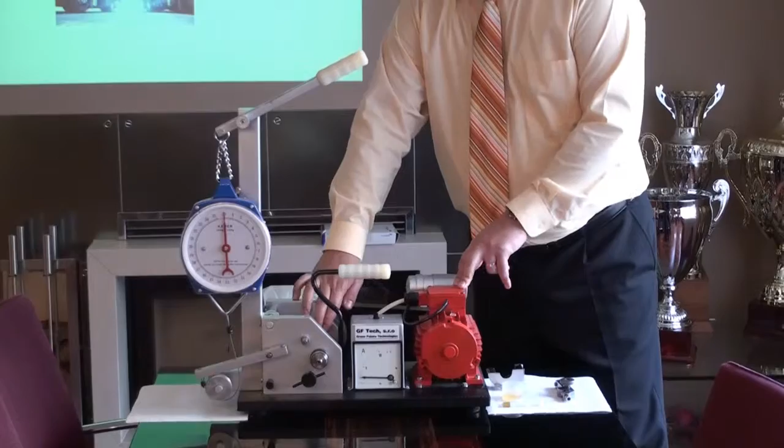Let's now go over to the practical part of our presentation. This machine you can see here is a simple variant of a more complicated laboratory testing machine. It consists of an electric motor which drives this axle. On the end of this axle there is an outer bearing ring which rotates. We will generate friction by pushing this opposite part against the bearing ring, and we will try to stop the ring from rotating.

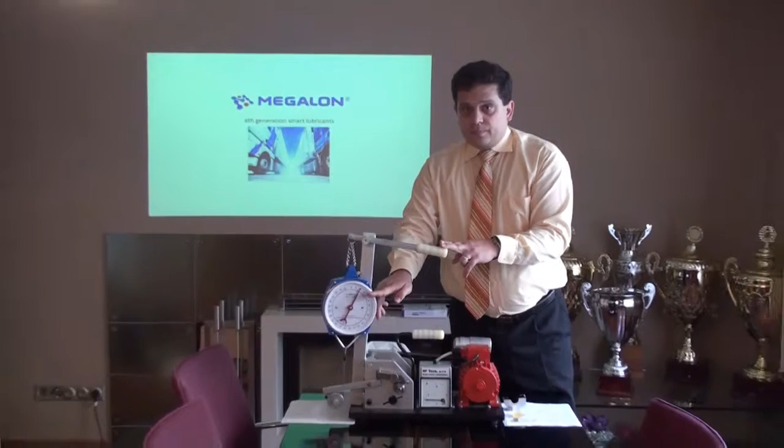This is what we will do. Under several types of condition, we will constantly check the power applied to the bearing ring in kilograms, the power consumption in ampere, and the attrition, which we will see on this opposite part.

The condition number one is a so-called dry test. We want to see how much power we need to apply, how high the power consumption will be, and how the attrition will look if we don't use any lubricant.

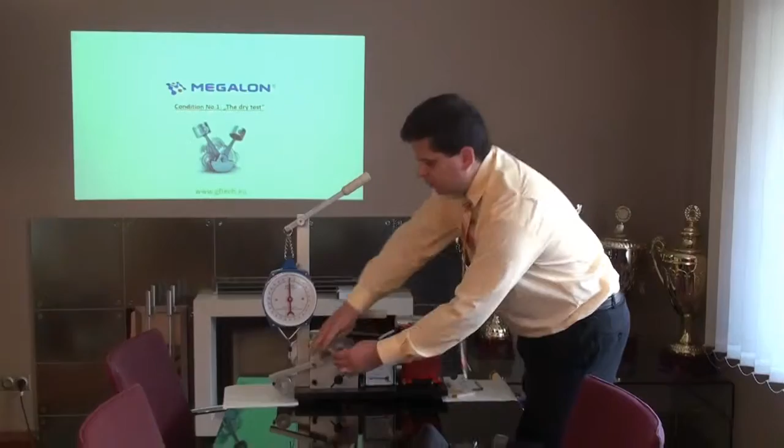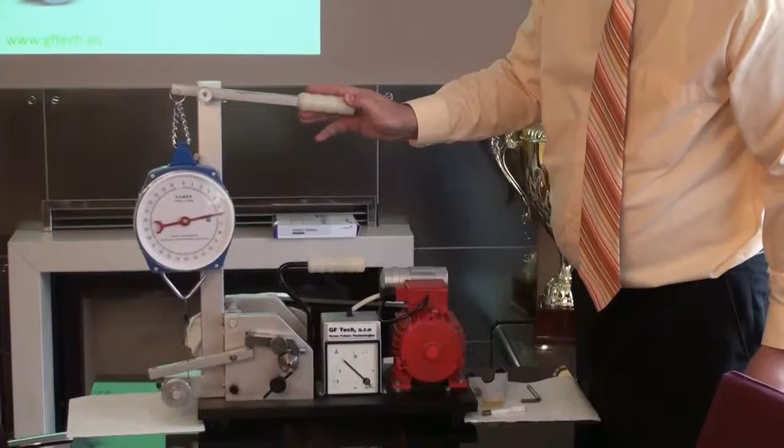We see that the machine got jammed after applying 5 kg of power. Its power consumption was 8 ampere, and now let's see how the opposite part will look.

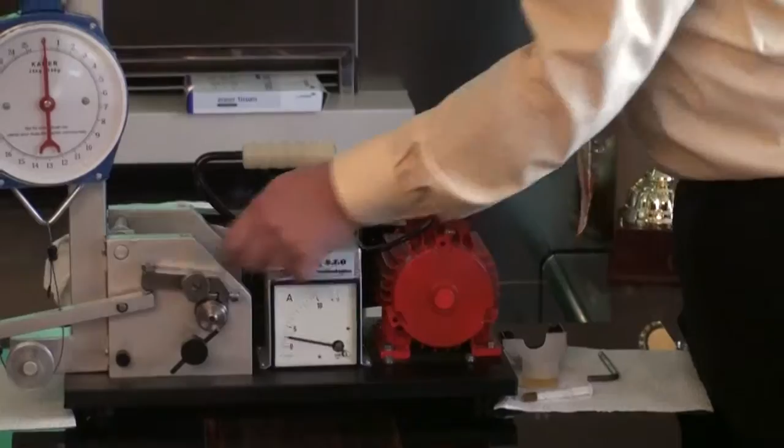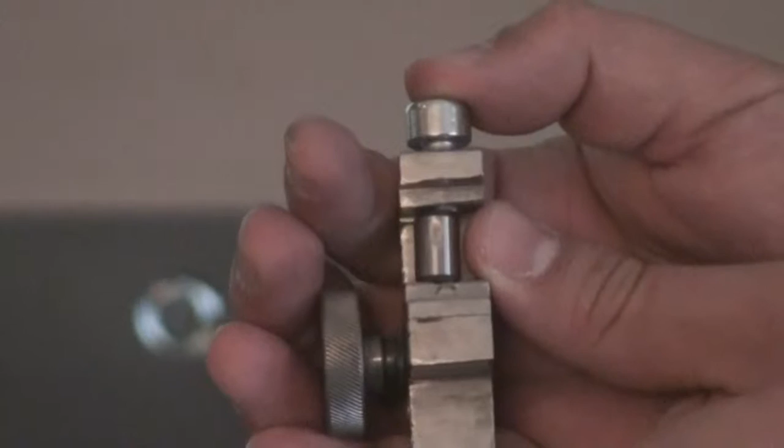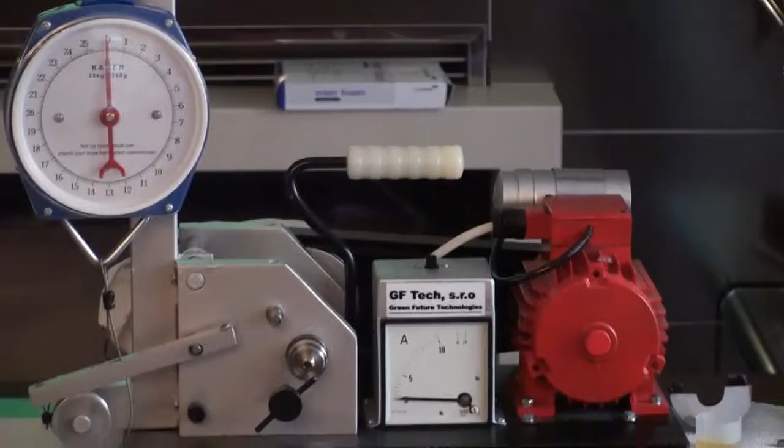You can see that the opposite part has been abraded and parts of it stayed even on the outer bearing ring. This we need to clean, so the following testing conditions are not affected. The outer bearing ring has been cleaned, and now we need to turn the opposite part to a non-abraded spot so we can compare the attrition of all testing conditions.

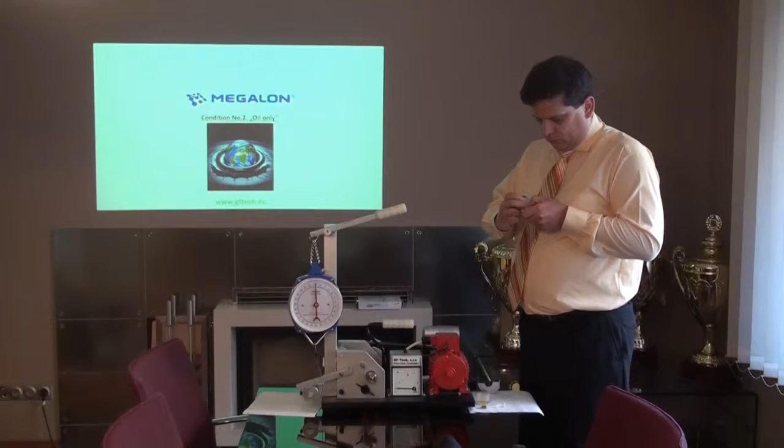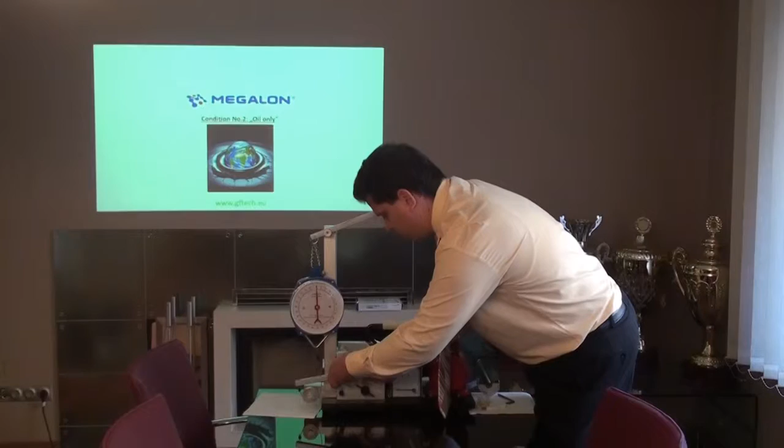Under condition number 2, we will use oil only. Like I already mentioned, it is not important to which oil Megalon is added, so I have here some semi-synthetic oil from the nearest gas station to perform this test. We add 7.5 ml and fix the oil tap to the machine.

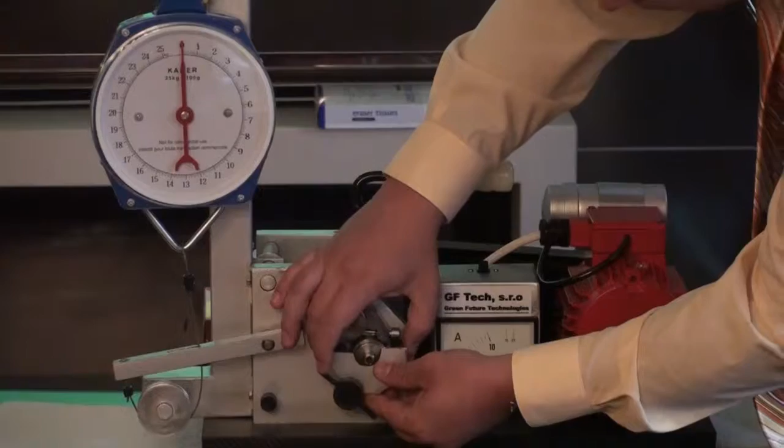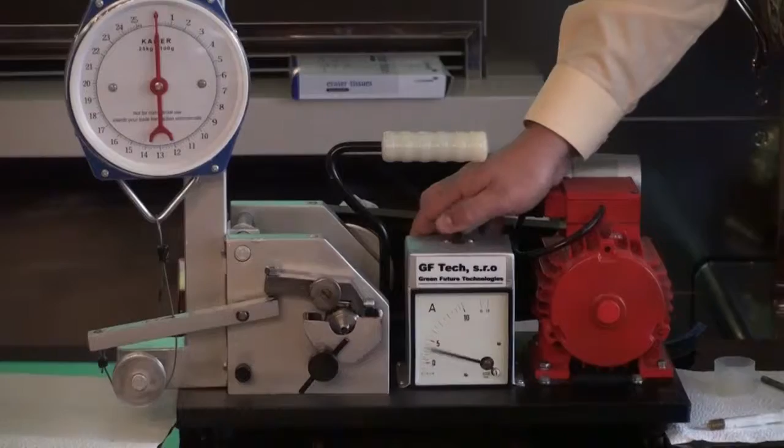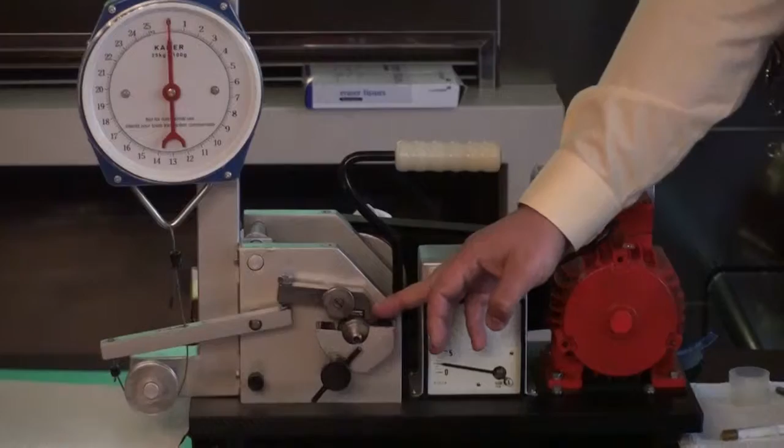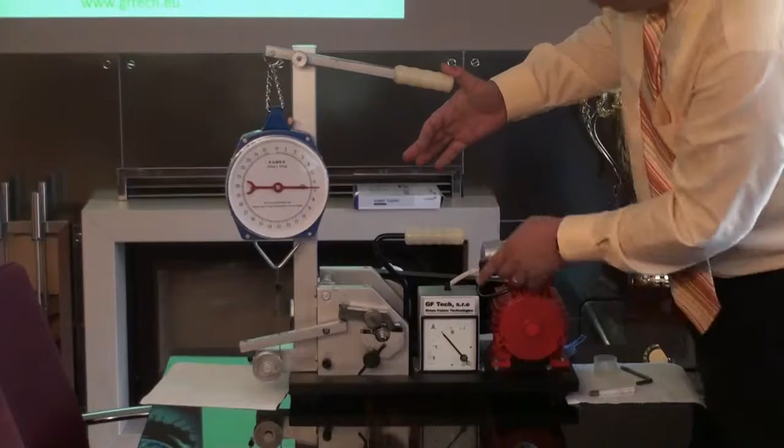We can see that the bearing ring is being lubricated properly. Now, when we start to push the opposing part against the bearing ring, we see that the machine got jammed after about 7 kg of power applied. It consumed 8 amperes. And now let's check the opposite part.

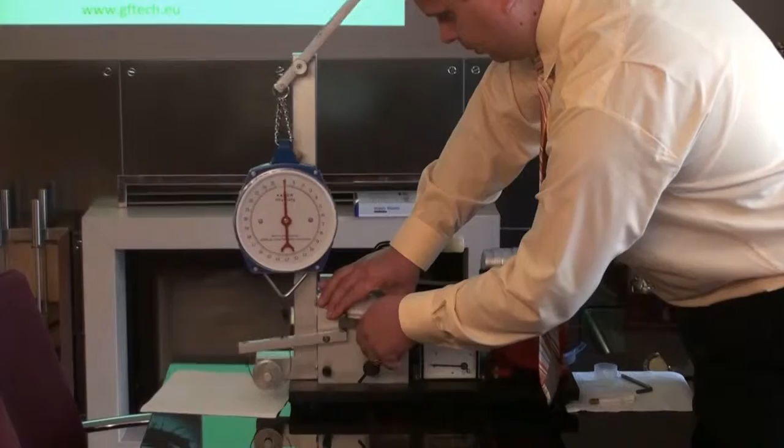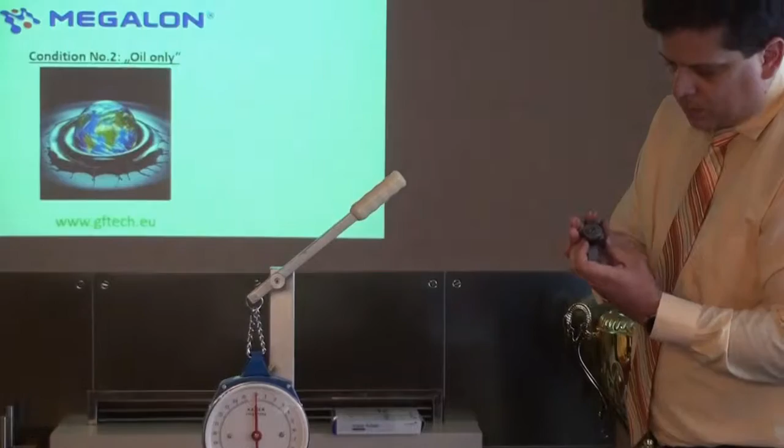Next to the first condition, we can see the attrition caused by condition number 2. We turn the opposite part again to create a new non-abraded spot.

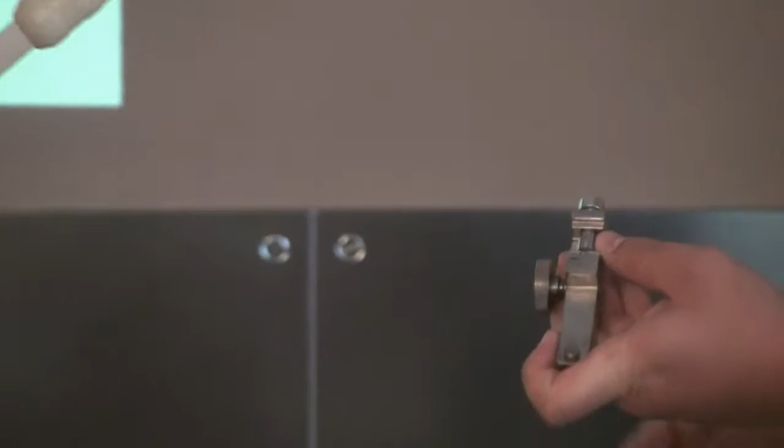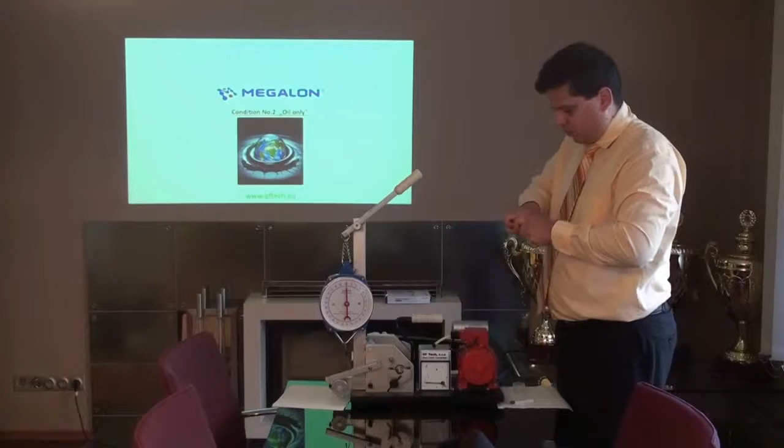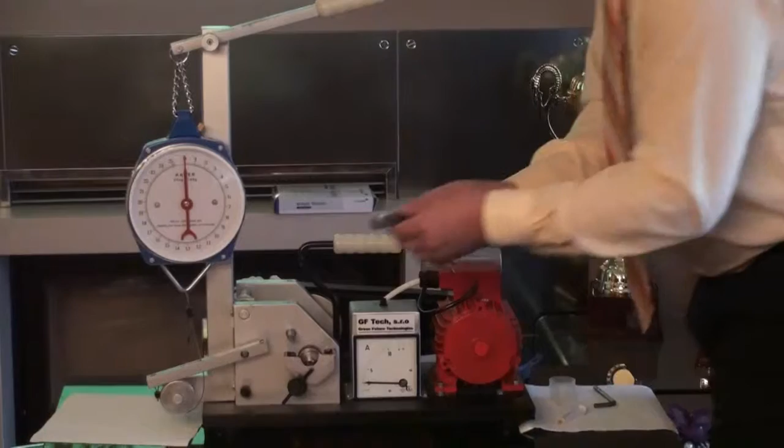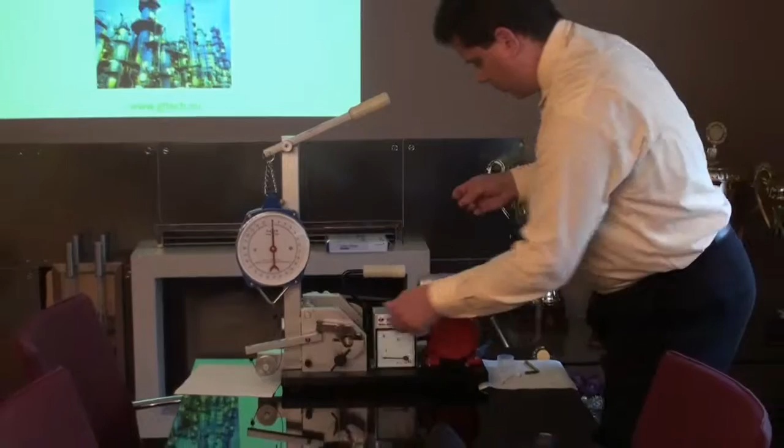Now, to simulate real life, we won't clean the outer ring and go on to condition number 3. We will add 10% of Megalon to the oil filling. Since we added 7.5 milliliters of oil, we need to add 0.75 milliliters of Megalon to hold the proportion. Now let's perform the test again.

For Megalon, it is ideal to have some time to incorporate into the metal. In the case of this machine, it is about 10 minutes, and for example, in the case of a car, it's about 500 kilometers. We don't have time for this now, so I try to make the test a little faster. We see that the machine is starting to lose noise. That's the first signal that the Megalon starts to incorporate.

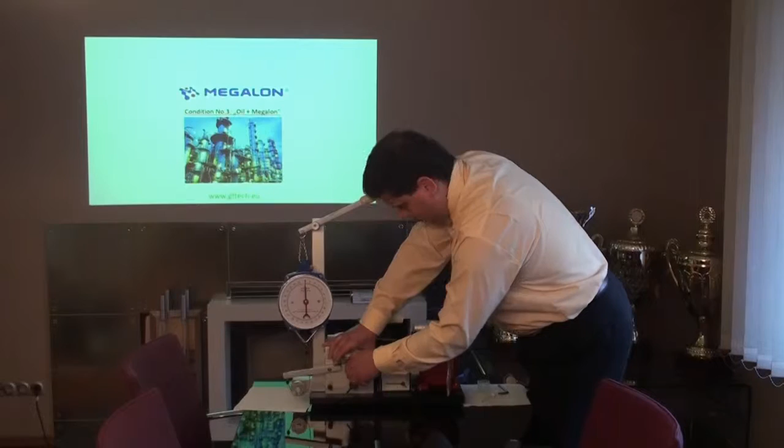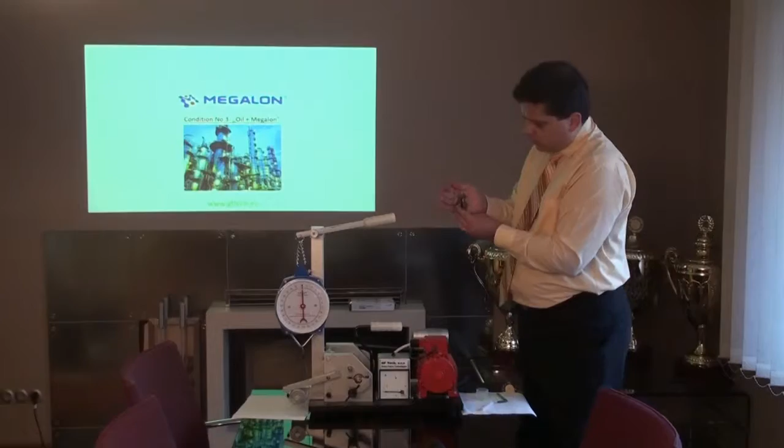We see that the machine didn't get jammed at all, even though we applied all measurable power. Its consumption stayed very constant and low, but let's see what happened to the opposing part. Even though we applied several times as much power as before, the abrasion is much lower than under previous conditions. You can see that Megalon can significantly reduce the friction and abrasion, but that's not everything. We have one more condition to test.

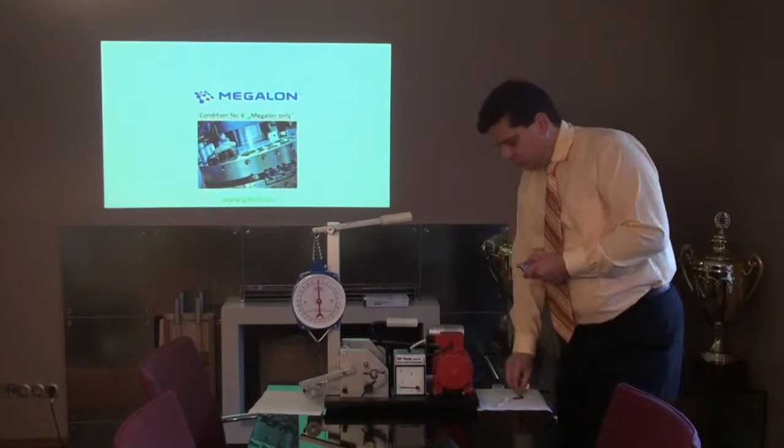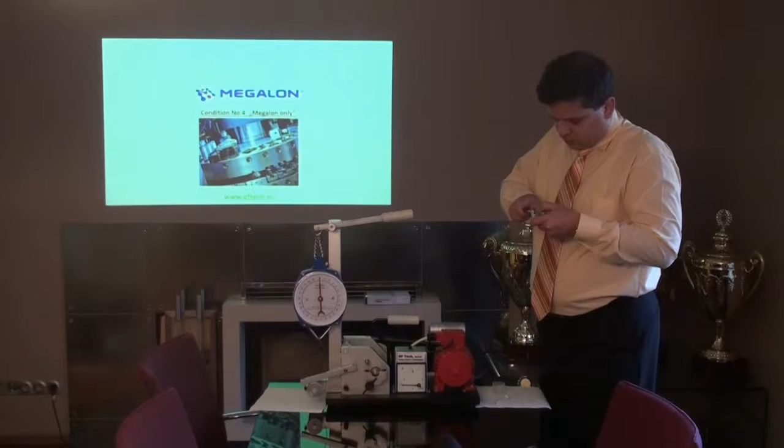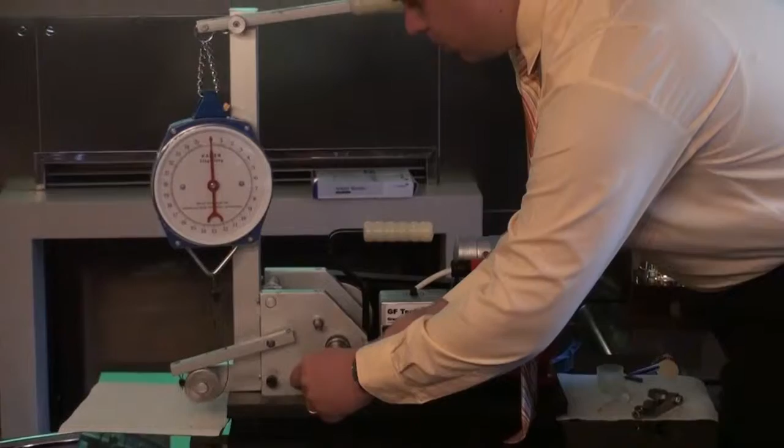Let's imagine that for some reason your car or industrial machine loses its oil filling. To simulate this, we set the oil tap aside and turn the opposite part to a new non-abraded spot. So, we start the machine and begin to pull the handle.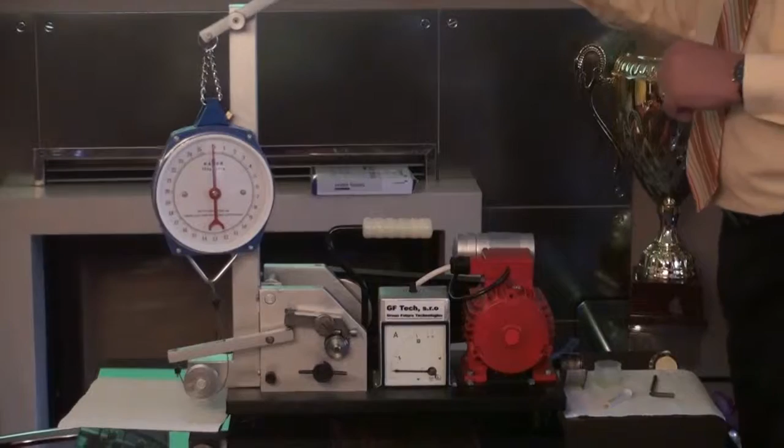You can see that we came to the point of the first jam of condition number 1, then crossed the point of jam of condition number 2 when using oil only. You can see that this time we came much farther without oil than before. Anyway, this may be an extreme situation and it doesn't happen too often, but it can happen and it's better to be prepared, because it can win you some time to solve a difficult situation and save your car or machine from big damage. But we didn't check the opposite part. Let's do it.

Now we have 4 abrasion spots here. The first one when running dry, the second one when running with oil only, the third one when using oil plus Megalon, and the fourth one, which should look like the first one since we have run dry too. Well, it doesn't. Since we used Megalon in an extreme condition, it got incorporated faster and created a much better protective layer.

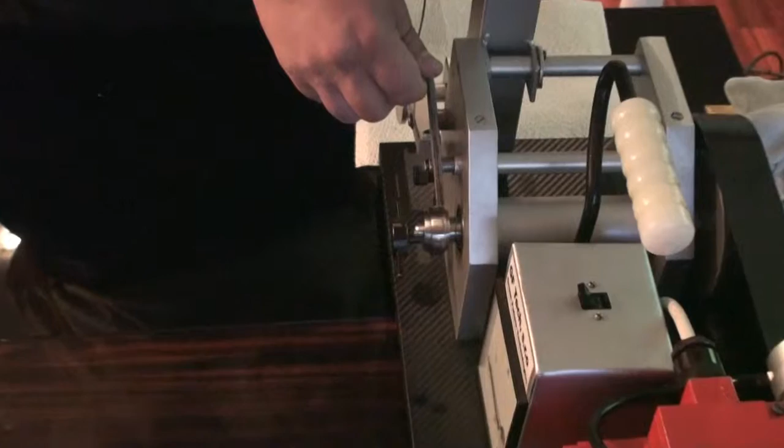On the outer ring we can see a shiny line that differs from the rest of the material. This is the metal organic coating, the so-called protective layer. Since we applied the pressure only at one point, we have only one thin line here. But if we took apart an engine of a car where Megalon has been incorporated, the whole engine would look this shiny.

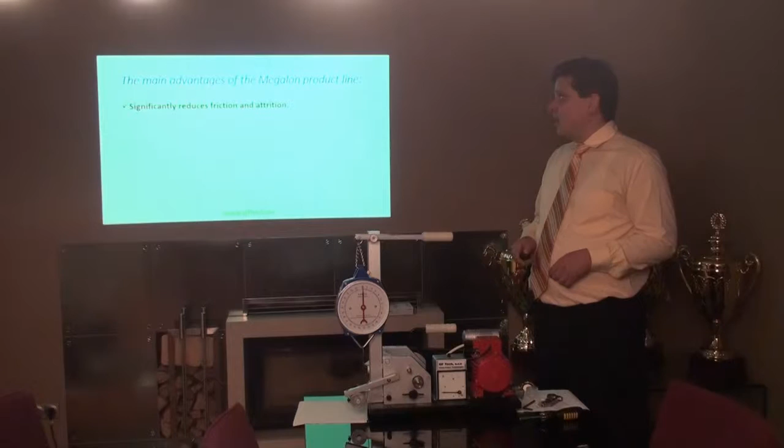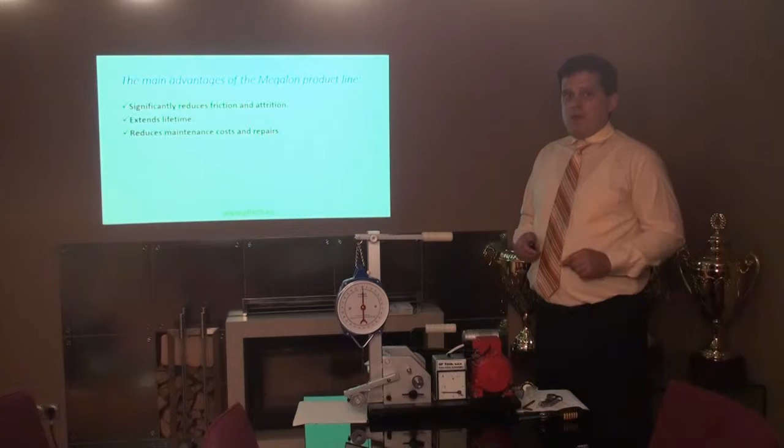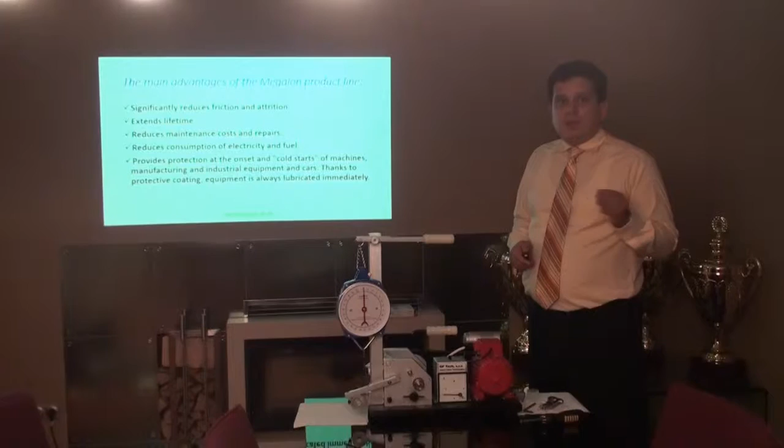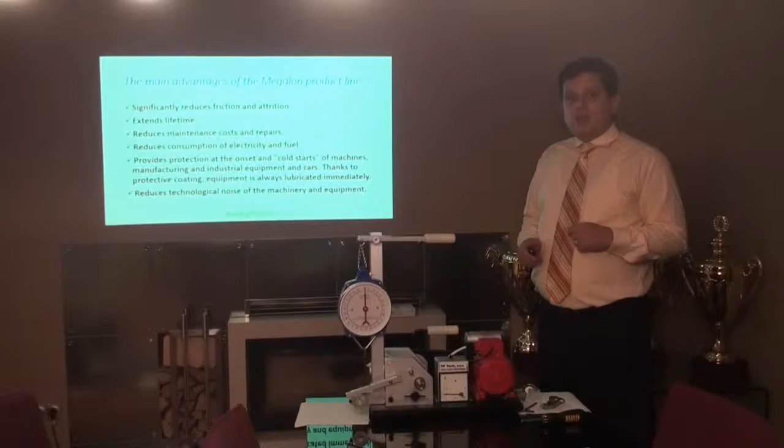So, this is what Megalon can do for you. It significantly reduces the friction and attrition. It extends lifetime. It also reduces maintenance costs and repairs. Reduces consumption of electricity and fuel. It provides protection at the onset and cold starts of machines, manufacturing and industrial equipment and cars. Thanks to the protective coating, equipment is always lubricated immediately. It reduces technological noise of the machinery and equipment.